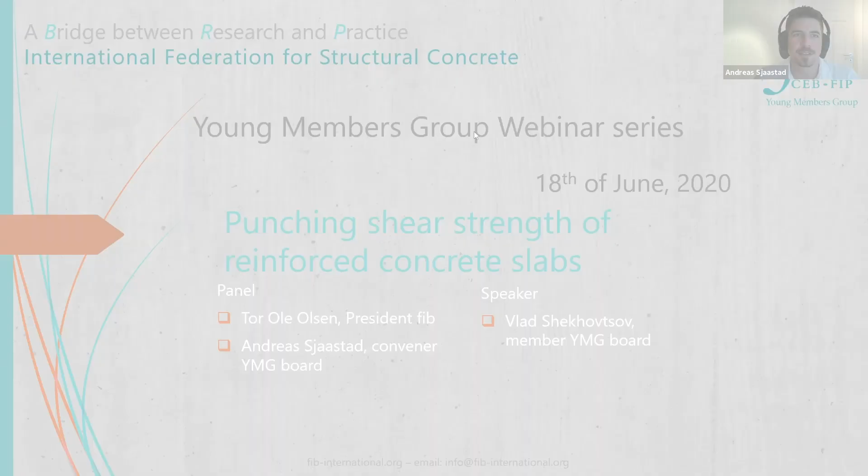I'm Andreas Sjaastad, I'm the convener of the Young Members Group within the FIB. I usually work in Norway for a contractor as a concrete technologist. But I early started getting interest in doing association work.

Today we are so lucky to have the president of the FIB with us, Tor Ole Olsen, and also Vlad Shekhovtsov. He's from Ukraine, and he's a member of the Young Members Group board and has done very nice work on punching shear, which we will hear about later today. After a brief introduction and some practical information, we will hear from Tor, and then we'll let Vlad have some minutes to talk about his work, and we'll also have Q&A, questions and answers.

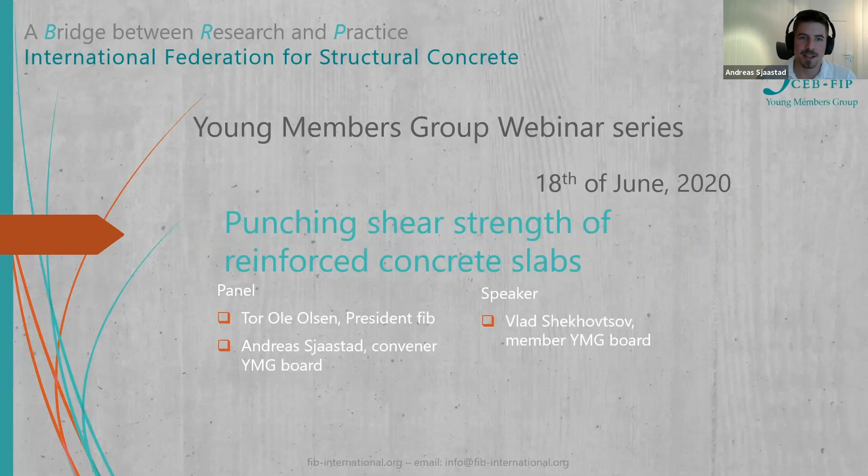First, a brief introduction about the Young Members Group. Most of you have hopefully heard about the Young Members Group within the FIB, but the FIB is an international association for structural concrete, made up of national concrete or structural engineering associations that come together and try to collaborate. Within these groups, in these countries, they have Young Members Groups to both train and to have a network and to teach each other, so that we are better prepared for the future.

So the International Young Members Group is trying to link and coordinate all the existing Young Members Groups, and also help build new ones. So if you are coming from a country that does not have a Young Members Group, or even a concrete or structural engineering association, please contact us and we are able to help you eventually, either via video conference or email. We try to keep it simple, but we have experience and we'll guide you through how to create such a group.

The International Young Members Group tries to organize meetings, events, symposiums, and conferences, and help young members participate in both the planning and execution of these events. We also try to encourage and help people get into task groups or commissions within the FIB, or at least in their national members group, the national concrete or structural engineering association.

Thank you, Andreas. Can you hear me? Yes, we can hear you. Hello everyone, and first of all, thank you for inviting me to this webinar.

I would very much like to take the opportunity to say a few words about FIB and why the YMG is so important for FIB.

FIB has an ongoing strategy process now, and the YMG is scoring very high in that process on what FIB shall focus on.

Why is that? There are many reasons, some of them I have listed here. One is very obvious: without recruitment, FIB will cease to exist.

Diversity is important for FIB, as it is for every organization, but especially so for an organization full of experts. If you have specialized on, for example, shear for decades, you will be clever on shear, but you may not be a champion on evaluating what are the real challenges of the world, nor how to solve them. So using shear as an example, it's just an example.

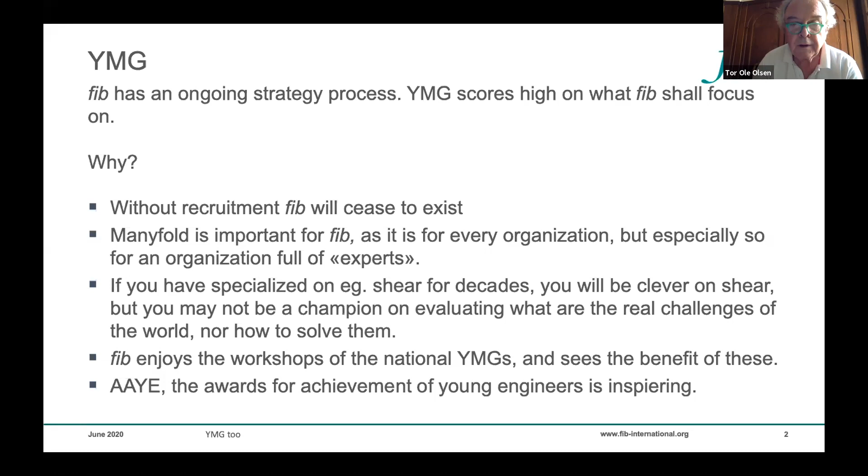FIB has, for many years now, given awards for achievement of young engineers, and that is inspiring for the entire FIB. There are two awards, one for practical engineers and one for research. And the people that receive them are very proud, and we are proud of them.

FIB member nations produce 86% of the world production of cement. This means that FIB matters. FIB can influence the world in many aspects. It could be environmental, competence, cost, and many others. And this is a responsibility that we feel and that we want to use properly.

Andreas mentioned the committees and things within FIB. FIB has 2,400 functions in its committees and other things. And I dare say that every aspect of concrete is represented in one way or another, at one place or another. And how can you, or for that matter everyone, but you in this case, how can you benefit from the competence existing within FIB?

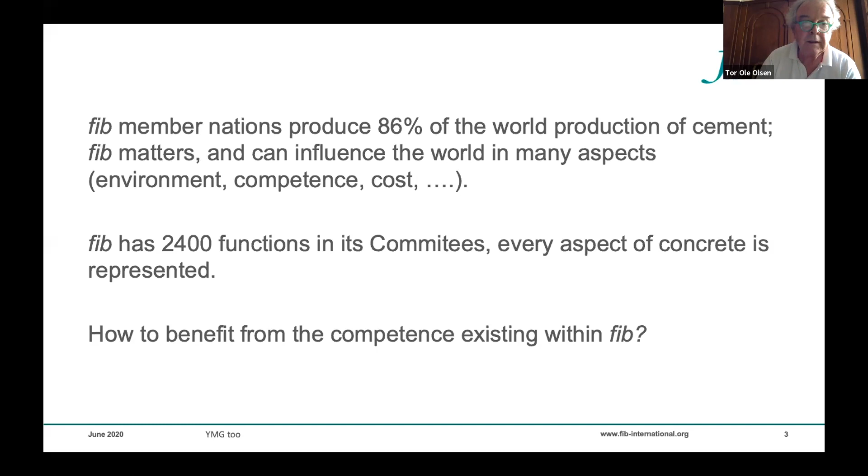FIB is discussing and hoping to launch an advisory council to enable retired active FIB members to still be active after retiring from professional work. Senior members can share their knowledge to help young professionals also become active within FIB functions.

FIB is launching a mentoring program. The FIB mentoring program brings together experienced professionals keen to share their knowledge and network, and young professionals starting their professional career who are in need of advice from knowledgeable engineers. Mentoring is a cooperative partnership in which seasoned engineers pass on experience and knowledge to engineers with less practical and theoretical experience. Both parties stand to gain from this partnership.

So this is a two-way thing. The young ones learn from the old ones to be more competent and active, and the old ones learn from the young ones to be less old.

I'd like to introduce Vlad. Hello, everybody. First of all, it's a little bit nervous to take a word after the president. I appreciate that this initiative gets a lot of attention and support of the big FIB association. It's very, very pleased for all of us, for all of young people. And about your slide with the pictures, it's understandable that you're not so old. So we learn something from you and you learn something from us.

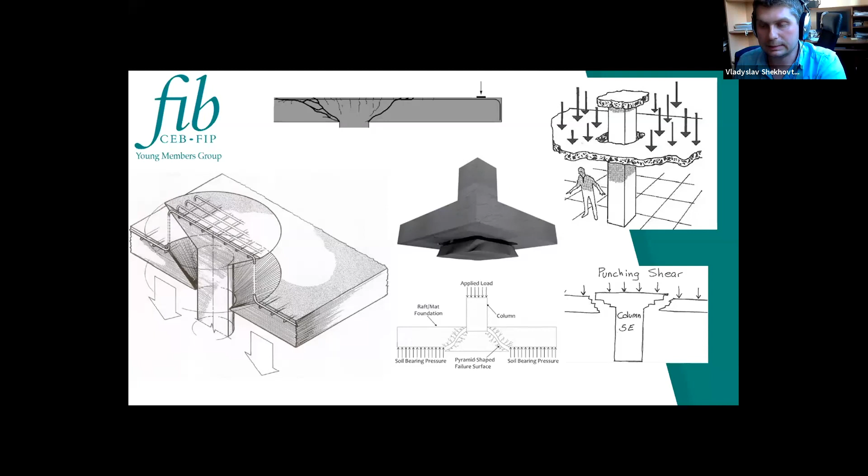We don't see the distribution of energy. We don't see characteristic cracks like in beams when they work on shear force, for example.

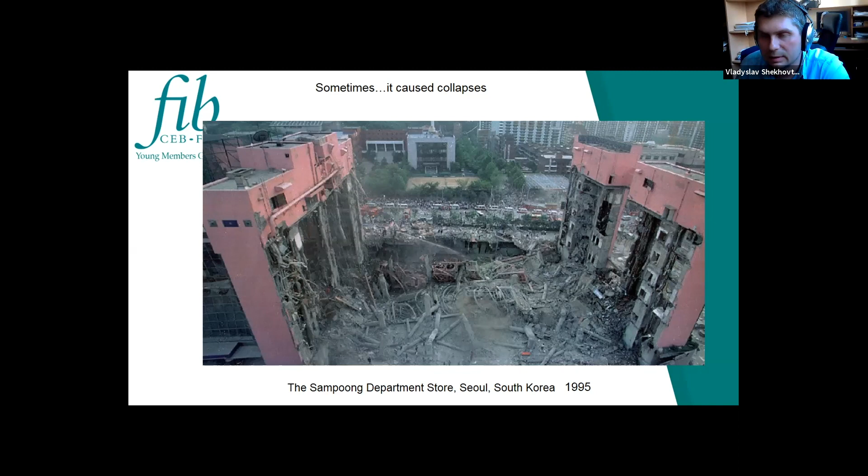So it was in 1995. The next is a car park in the United Kingdom, 1997. This is an old building, it was built in 1965. And the problem was, in this case, a problem of maintaining this building, because there were problems with concrete, with repairing, with corrosion of reinforcement, corrosion of concrete, and defects of concrete, and also not enough reinforcement for these zones.

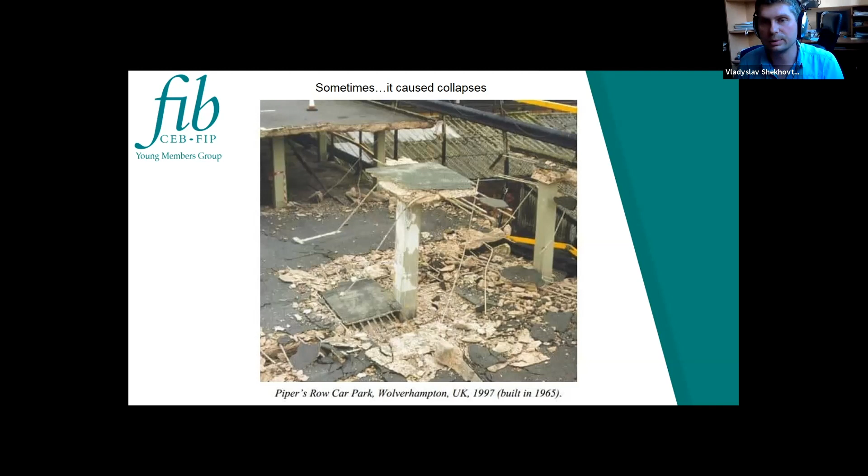So the next is from Russia, it is a swimming pool bowl in Krasnodar, a new sports center. The investigation, as I know from news, from papers, is that there was a problem with some design issues and some problems with materials, that not a suitable type of concrete was used for such constructions. And when there was testing of this bowl by filling it with water, the water flowed down from cracks, so it is a problem with material, I think, that caused such collapse. But the collapse is punching shear, as you see in this picture.

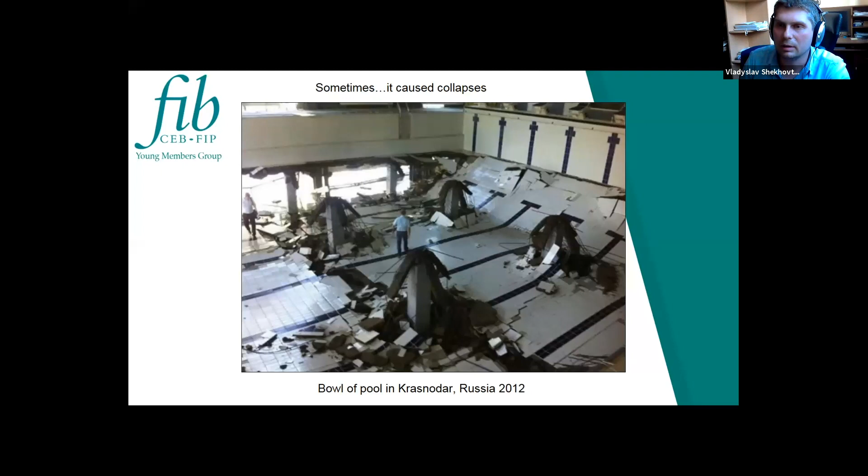So I found something on Twitter, maybe from Spain, because this account was in Spanish language, and we see such a situation under construction, that the slab collapses from punching shear on the columns, rectangular columns. So after these pictures, we fully understand that we can't neglect this situation, this possible stress condition which occurs in the body of a slab, in the body of such constructions.

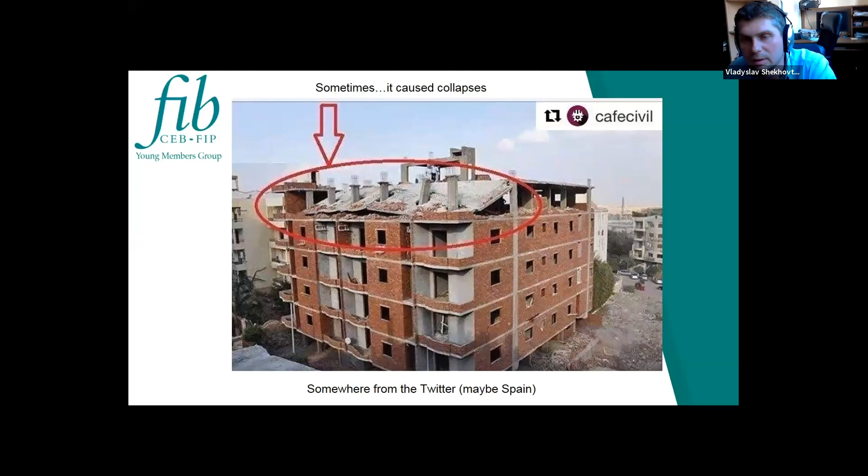What I want to share with you is my experience. My webinar's theme is sharing my experience with you. Maybe you will have questions after I finish. This investigation is not up to date. This research which I want to show you is a part of large research work that has been carried out from 2008, in which I directly performed experiments and adapted some numerical models. All research was performed by me under the supervision of Professor Klovanich, he's my thesis supervisor.

And now I want to say a few words on why it was necessary to lead such investigations, in some short form, to show you. Okay, let's begin. Till 2013, Ukraine used old codes, Soviet Union codes, to design concrete and reinforced concrete structures. This was from year 1987.

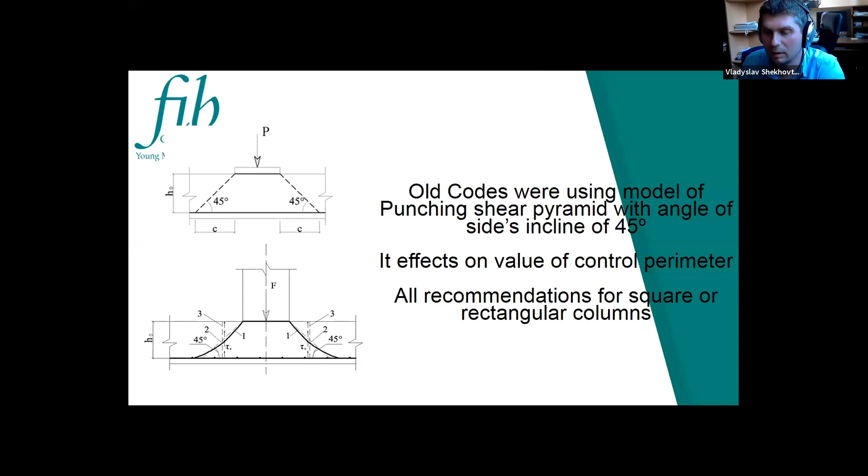Let's see what they came. This is the formula from old codes. This formula is from Russian codes, they still used such theory. In Ukraine, we used Eurocode theory for the punching.

As I said, till 2013, before the current code was approved, we used the prediction of punching force with such formula. This formula is from old standards.

The scientific idea was laid down, as I said, in the Soviet times. I want to say that now in Eurocode we use the concept that punching shear depends on compressive strength of concrete, but the previous theory was that punching force depends on tensile strength of concrete.

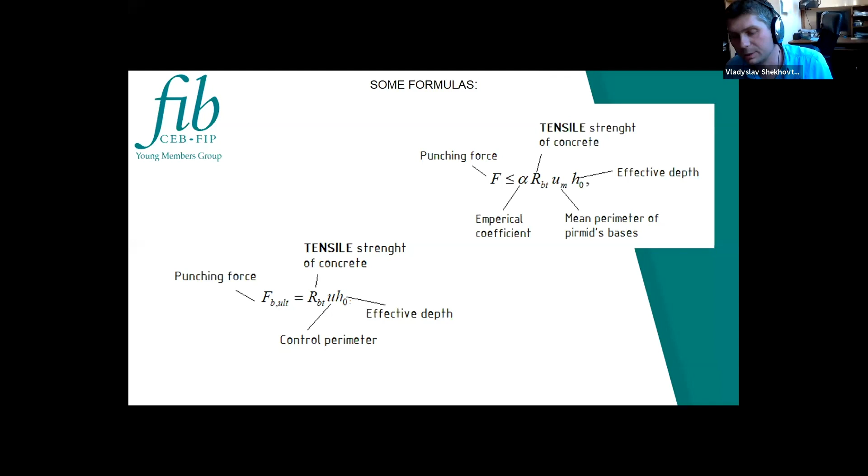I need to remind you that at that time when I led this experiment, we still used the old standard. So we tried to get something new, but we had to base it on the standards that actually existed at the time. So we made the specimens.

Here are some parameters. The reinforcement of the specimen was calculated in such a way that we would have collapse from punching, not from bending moment.

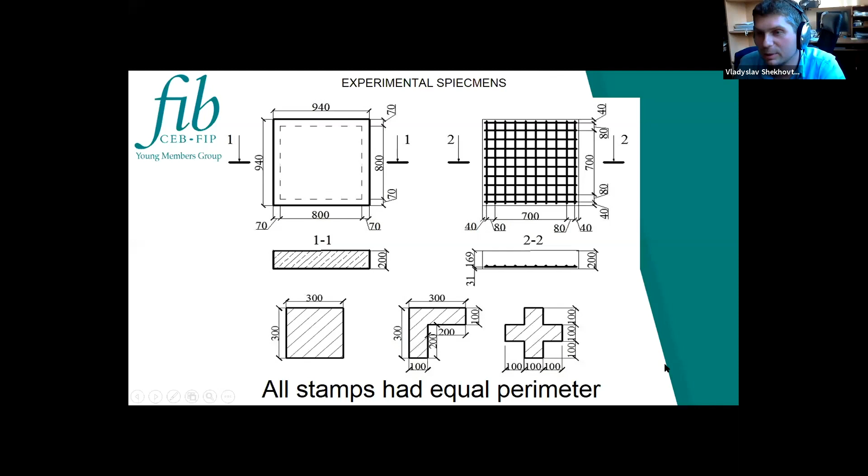And if you remember the last slide, the perimeter of the punching pyramid plays a key role in that formula. Here we see the various stamps. They model a cross section of columns, but they all have equal perimeter. So the formula is not based on cross section - we have different columns, but the same perimeter.

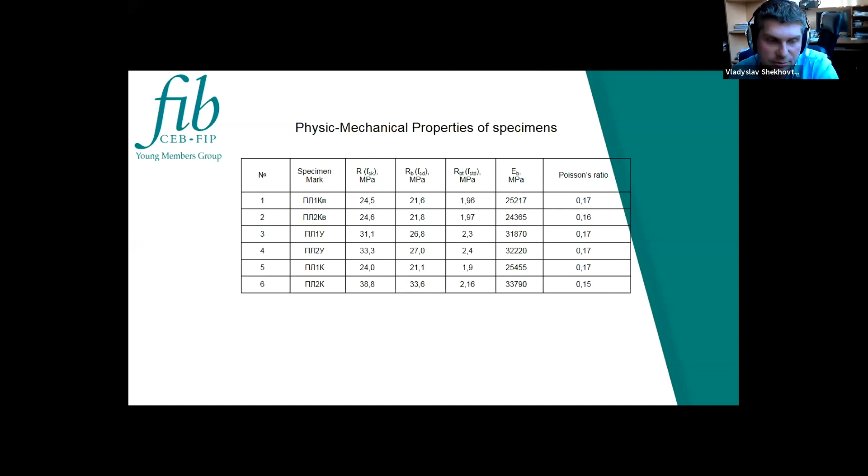We used such power of this testing machine when testing anchors of atomic nuclear station plates which hold the reactor zone. They have anchors, and these anchors were tested on this machine, and the failure load was near 950 tons, if I don't mistake.

So I saw that this machine was working at the best of its opportunity. Plates were supported by perimeter, so the upper part was stable and the pressure came from the lower part. So we have an upside-down situation, but with such a frame we can see the bottom surface of a plate.

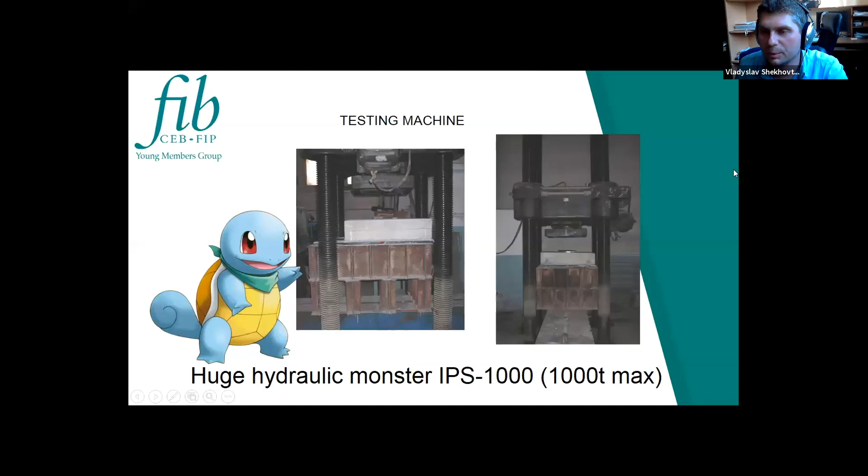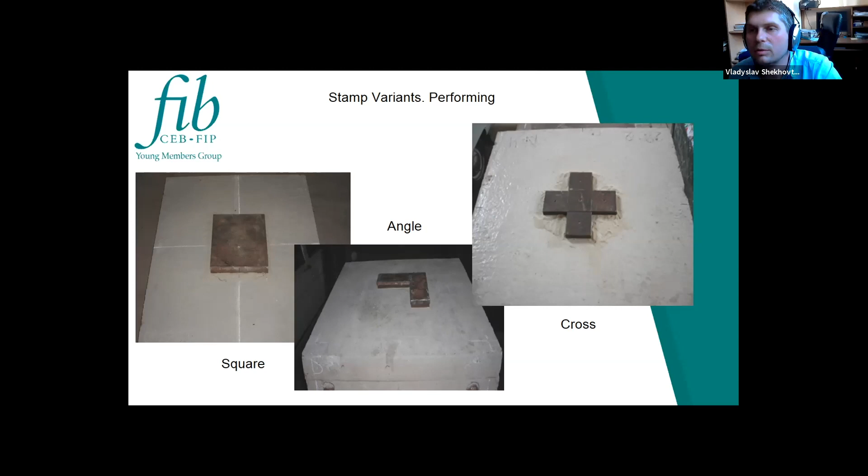Here you see the stamps. The stamps were square, angle, form, and cross section shapes. The next slides will use these terms for defining the plates and specimens.

So the next slides will show crack patterns of slabs on all sides, upper and bottom surfaces. Here we presented patterns for 25, 50, 75, and 95% of failure load steps.

So the next is the second specimen, the same situation in the final stages.

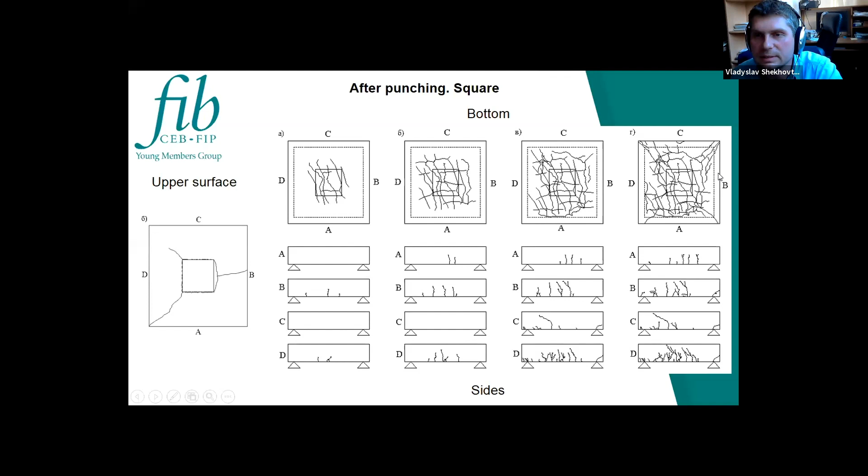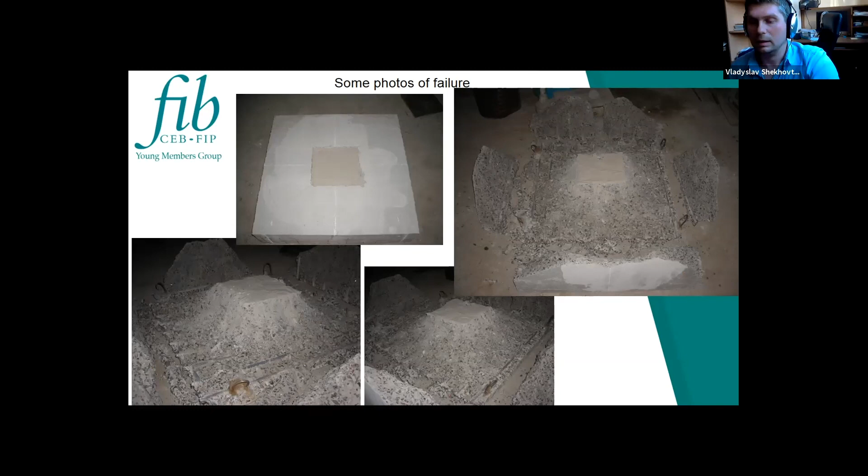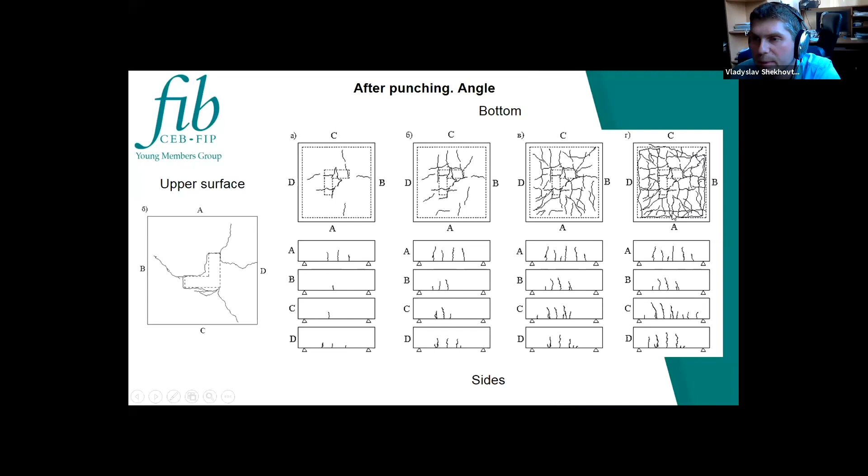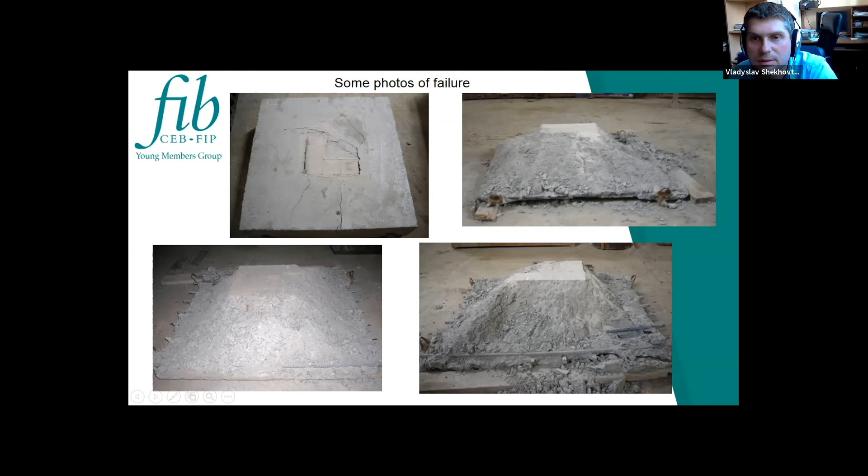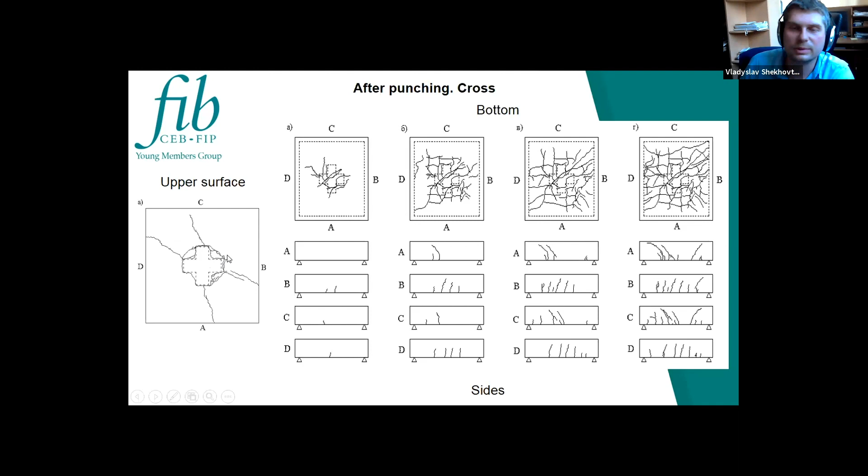And yes, in the photos you see the pyramid differs from the square stamp, and it has another form. So the pattern for the cross section is interesting; on the upper surface we have almost a circle here.

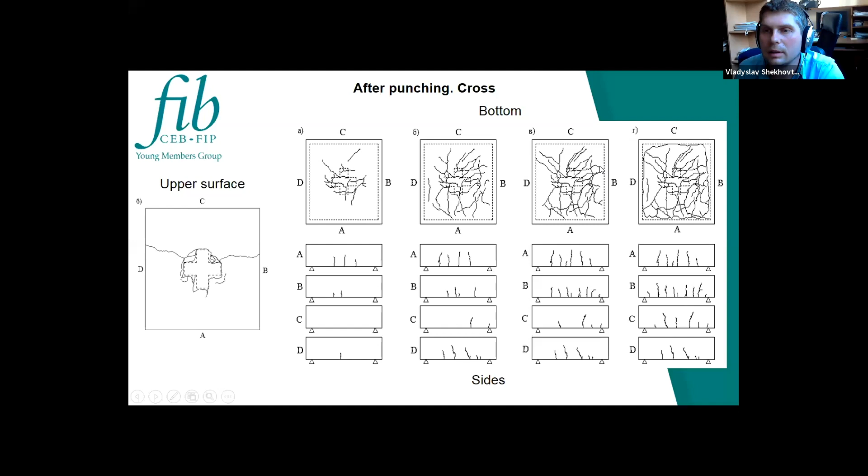This one, the punching crack, is on the bottom surface, and here are the pictures of the pyramid after experiments, after punching. As you can see, the difference is present, and there are no questions about the angle of 45 degrees.

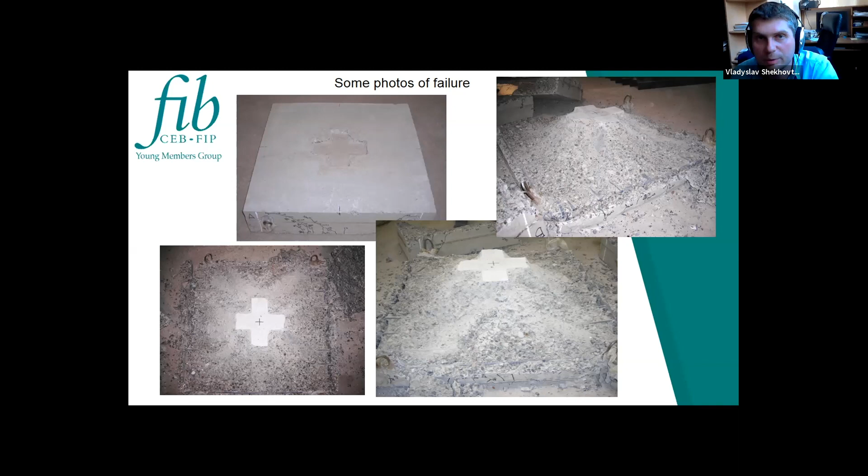We need to investigate, we need to correct these formulas. You see, it is a sketch showing the plan with the quantity of sides of such pyramids, and you see that the square is almost like in the old theory, but when we talk about the cross section, about the angle, we have something different.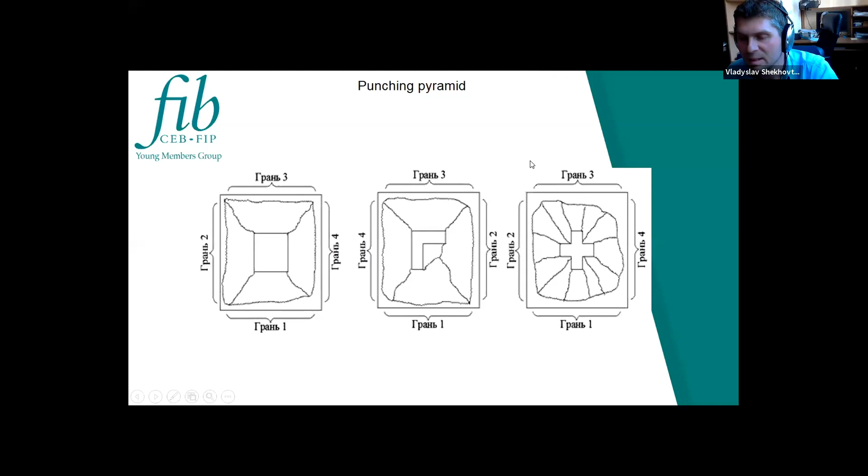And what we see if we use the old codes, there are some problems with bottom surfaces and the definition of the perimeter of the bases. You see this picture, you see these pictures, and they are different. So we must improve this situation.

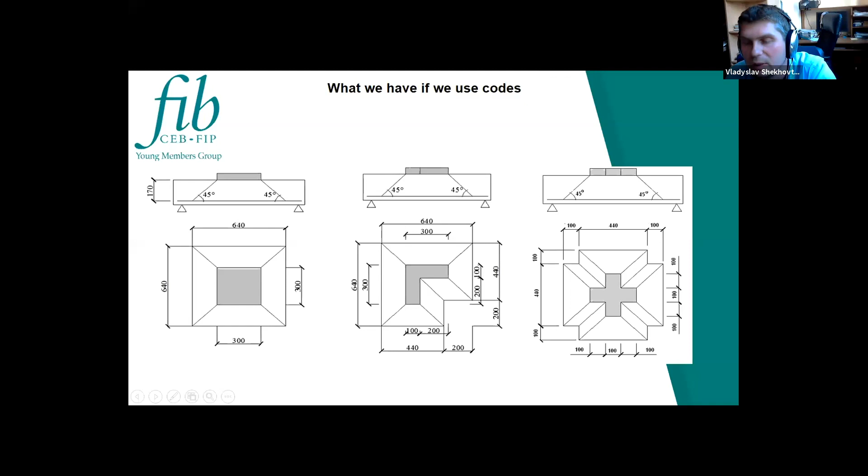It is not allowed, because the prediction is not true. It is a dangerous prediction.

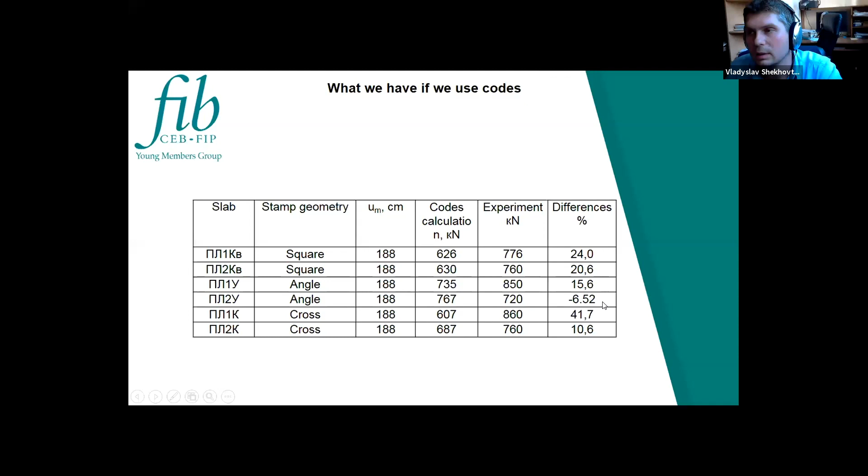So I think I lost one slide, the square angle, cross slide. But we can see the angles are different from 45 degrees, 45 degrees.

Here you see actual angles of inclination of the sides of the pyramid, and here's the column which compares the code's angle and the real angle which we took from the experiments. This is a mean value of these angles.

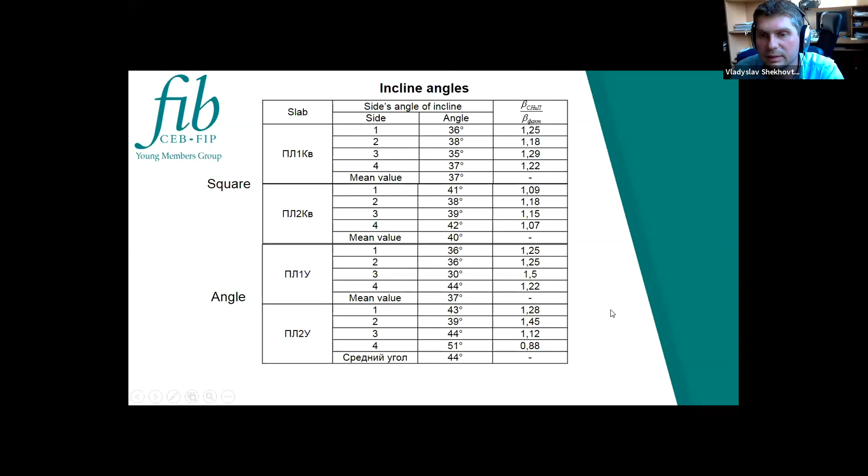This is also a mean value. So we improved, we tried to use the real angles that we got from the experiment in those formulas, and we compared with experimental data, experimental values of punching, and we see the difference.

The difference is acceptable, it's normal, like 10%. It's very good, I think so. But...

We understand, so before this slide I want to say that as you see, the agreement of the results is rather good, as I said, but the way of breaking slabs and measuring angles is not an option.

Sorry? Is everything okay? Yeah, I'm involved in my speech, so I can continue, yes? Yes, you can continue. Yeah, works very well, yeah.

Yeah, okay, I said that there's breaking, every time breaking the slabs and measuring these angles. It's not the way, it's not engineering, it's not the normal way for further calculation and further research.

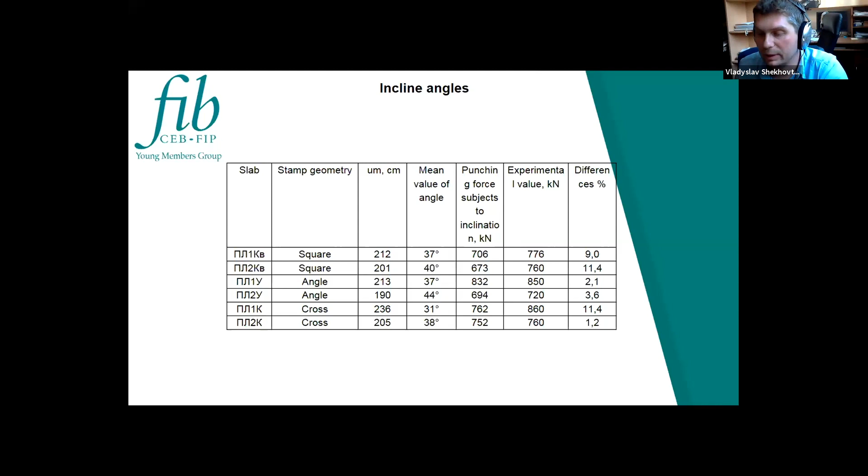So the best way is to continue research, is to use modeling, is to use calculation, finite element calculation. So the second iteration is numerical investigation.

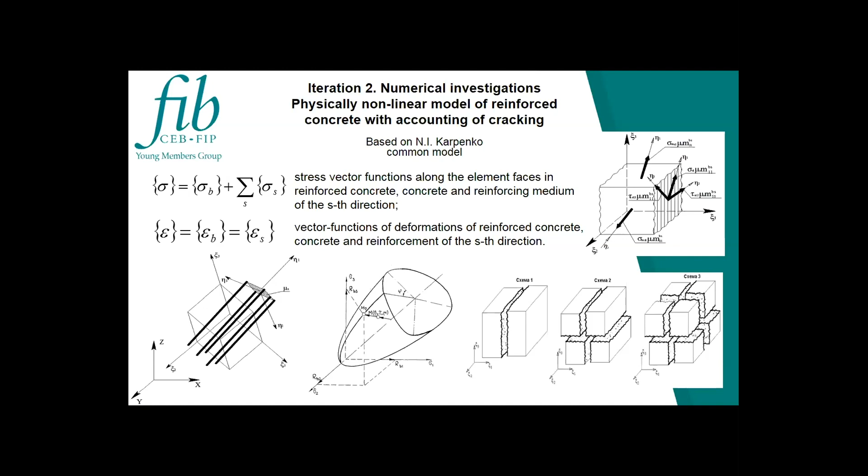We used a non-linear model of reinforced concrete with crack, which was proposed by Professor Karpenko. It was based on his model of concrete. So here you can see the stress function, vector function.

You can see the concrete surface, which holds in this model, possible cracking for a single structural element, and accounting for reinforcement.

I know that this model has an alternative, because we used not reinforcement bars, but we used reinforcement ratio. But we can use all types in such a way. We can use it in a more easy way, I think so.

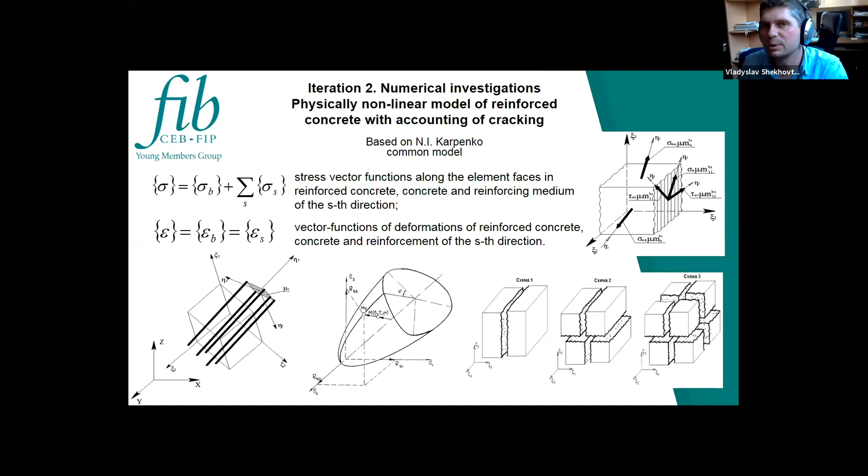We can use all types of reinforcement and all types of reinforcement directions. So the model allows us to do this.

My supervisor, Professor Klovanich, created a non-profit finite element software package for such numerical modeling, to model various physical and mechanical processes occurring in concrete, because concrete is a composite and rather hard material to get real behavior in the finite element modeling at all, not the finite element like an instrument.

This complex uses a volumetric, 8-node physically non-linear finite element. Such an element allows you to get fair and accurate results.

So most importantly, it is possible to refine the physical model of concrete with new data and with new approaches. Yeah, I think this is my idea, with new approaches.

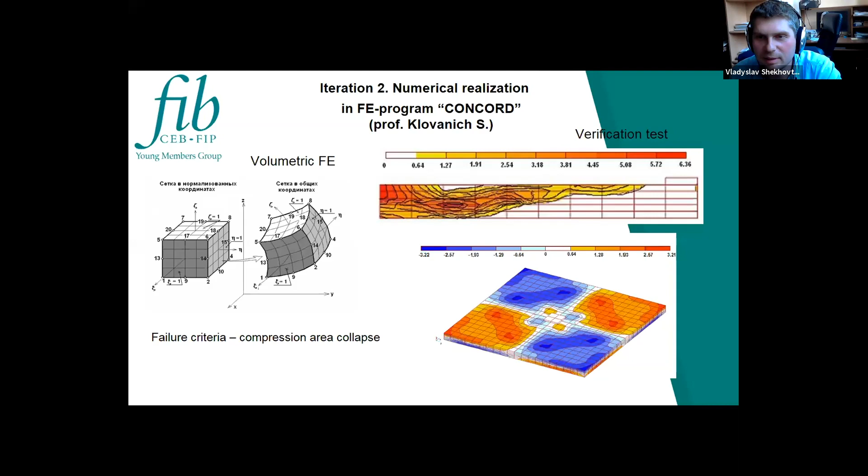So we tried to make some numerical investigation. Here you see directly the finite element models of the plates. I remember that this is a non-profit complex. This complex is not for engineering calculation, it is for research calculation.

So it has a lot of opportunities to develop the model, to improve the model with new theories, with new experimental data. So it is really helpful, and we get a good result.

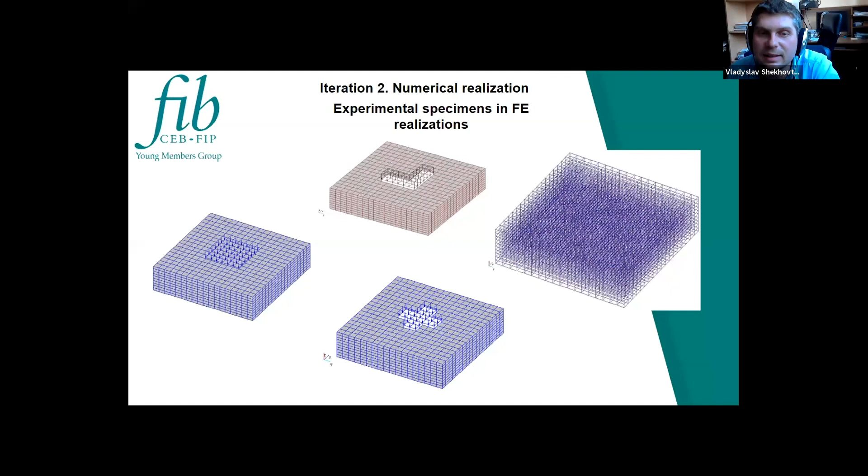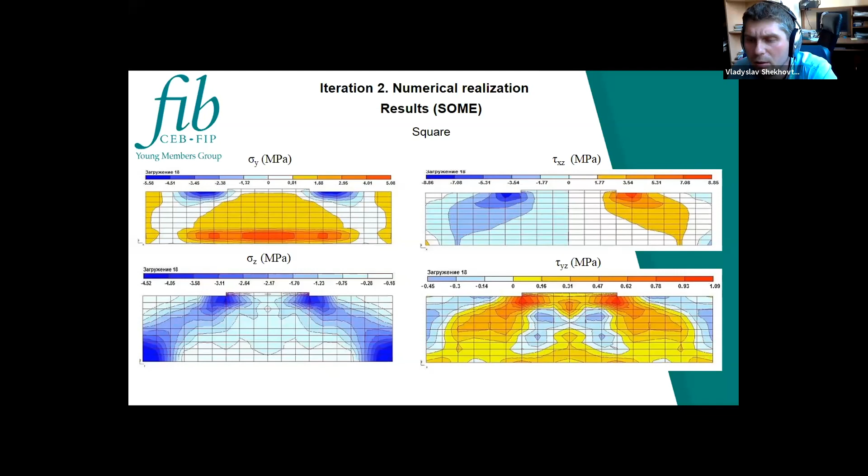From this, I think it is about square, about angle. You see the results about the cross section. And after that, we can conclude that this model can be and should be used in calculation for punching and numerical studies of this real complex process of punching shear.

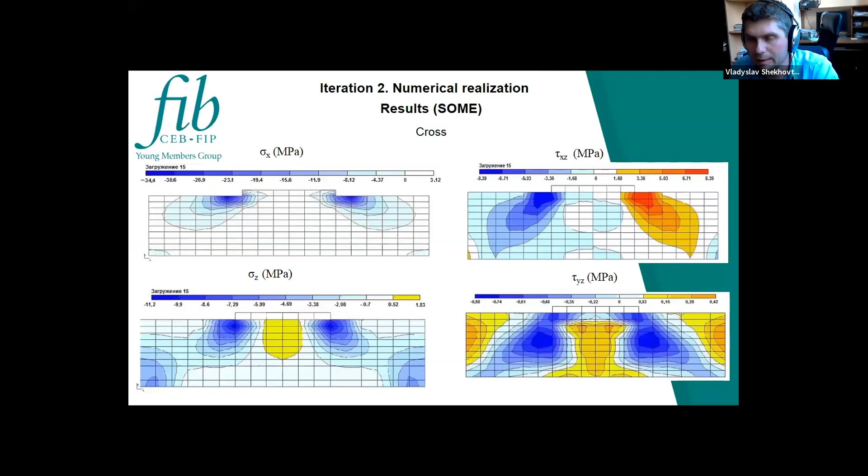This is only part of the results. I want to share experience, that we hold such experience that we investigated the form of the pyramid, that we have some data, some calculations, some proofs about this situation, and it is real good data for future work.

The future work was that we continued experiments on punching with fiber reinforced concrete. We even performed some experiments, using different types of metal fiber, but we had new standards released. Then we had a building crisis, and we ended up in a sad situation.

After the release of new codes, we saw no need for further research. It wasn't so necessary, so we had to stop. But big work was done, and a lot of data was achieved.

If we have some opportunity, we try to use this data - not experimental data, but we use the modeling of punching, our model in our complex. We have a limitation that it is not a sharing complex for one university, I don't know for personal use, but the research data is really big.

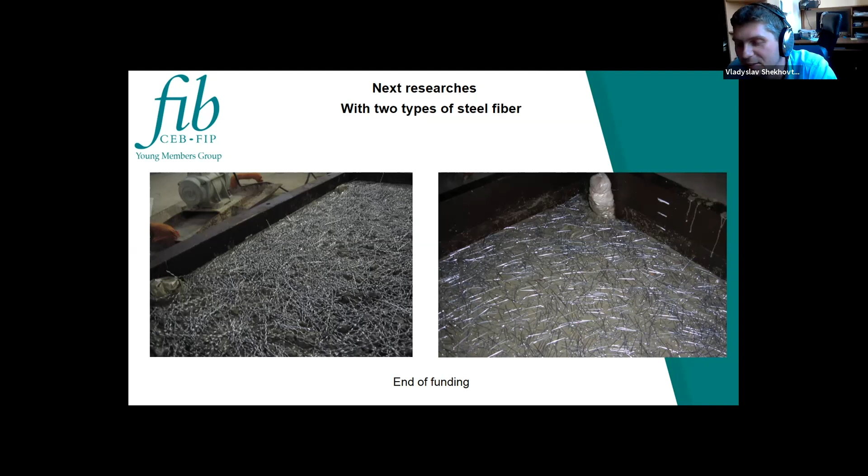But I successfully defended my thesis and stayed as a researcher. After that, I switched for some time to masonry structures, but now I'm with you again in the concrete community, and I think that's most all about it.